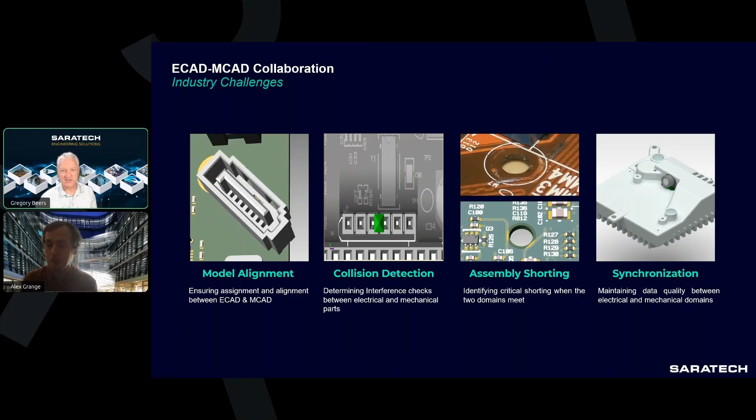And my personal favorite is this last one here, the synchronization. We all know what it's like to send an email and hope someone sees it today or tomorrow and replies back. Now, with the ECAD-MCAD collaboration, that synchronization happens much more rapidly and it's tracked.

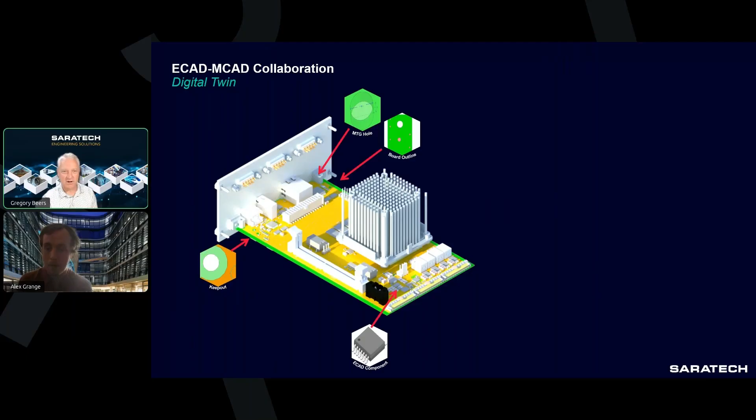So NX and Xpedition, we like to talk about this digital twin. You may have heard the digital twin and the digital thread. We're going to talk specifically about the digital twin for a moment. That's the actual piece that represents our board, right? And NX and Xpedition, they've been integrated now and really improve on the IDF interface, right? A lot of us have sent data back and forth in IDF, and we know that it's very static, right? We get a bare minimum of information. We get some holes, maybe a board outline, maybe some keep outs, very minimal data, right?

But now when we move into the world with a digital twin and the IDX interface, and you notice I got a real bad choice of words, right? IDF versus IDX, you got to enunciate, right? We have a lot more data, as you can see here, and that's just the tip of the iceberg as far as the Xpedition NX interface goes for this. We finally get to put a lot of things that we haven't historically been able to communicate through the IDX interface.

And one of my personal favorites is the fact that we can now handle RF elements, right? We can handle the cavities. We can handle those RF components being mounted down in the cavity, right? Specific filters and things that we couldn't recognize as an RF element on the board before, and of course, wire bonding.

And then the one that's near and dear to my heart is the flex information, right? There's a lot of crazy stuff that historically mechanical and electrical just didn't understand. We had to fake a lot of things. We've come a long way in just a few years, and Alex has really pushed hard to make sure we get a lot of this. We get the multiple board areas, we get the information of the actual stack up, we get the real thicknesses, right?

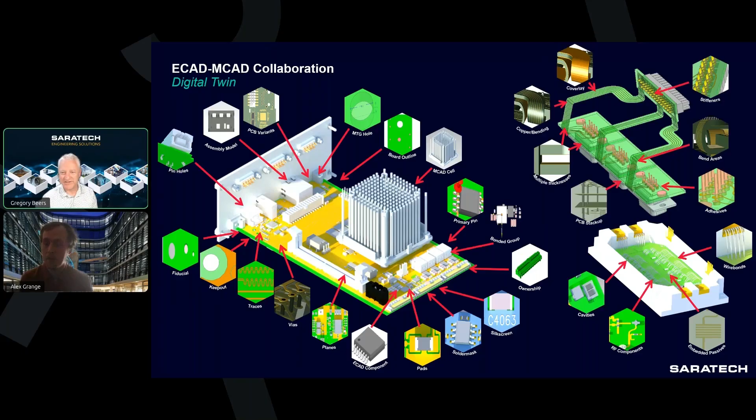And one thing that's super important here is we're able to bend not just the flex substrate and treat it like a solid, but we can bend the actual copper, right? And that really makes this rigid flex piece shine. So I talked about this is where the digital thread really shines. It's in this EDMD or ECAD-MCAD collaboration exchange. This is where things really shine.

One of the things that are important to know is that when we have this digital thread, that's the metadata, the data that we send up to Teamcenter or your PLM, right? And specifically, I'm going to talk to NX, Teamcenter, and Xpedition, mainly for obvious reasons, right? It's the tightest integration that I promote, but there are others, but I'm going to stick to those three for now. The digital twin, like I was talking about, that's really the 3D representation of the board, the physical board.

And you can see that by being able to have these communications, we reduce respins, right? And we pulled out some very important areas that respins happen. Not representing the 3D board properly, so mechanical and electrical can check it out. That causes respins. 3D interface checking. Do we have any collisions? Do we have anything hitting the chassis? Do we have a connector backwards, right? That can cause respins.

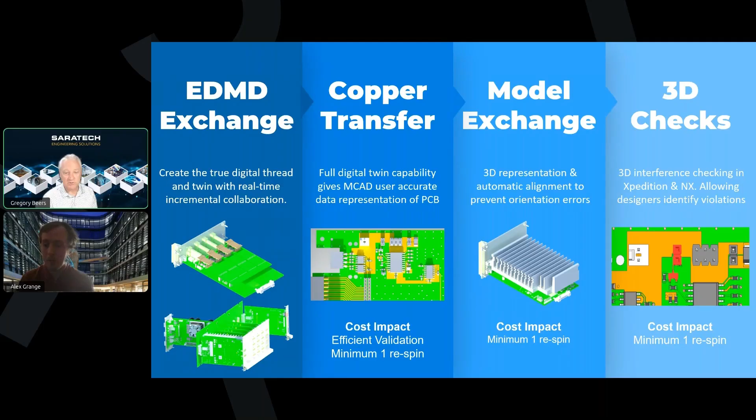And the last one is this model exchange, right? If we don't have the models correct between the mechanical world and the electrical world, we run into all kinds of problems. So the difference between IDF and IDX is really what we're talking about here with synchronization and design intent. It's real hard to show what your design intent is if you're not able to visualize what it is. If you're like me and you're a visual learner, this 3D realm really adds a lot of life to what we're doing.

And being able to propose and reject. If I send something over to my mechanical team from the electrical side, they have the ability to review it and say, no, you're crazy. You can't move that connector. It's going through a front panel, for example. So having ownership and the ability to control that's huge.

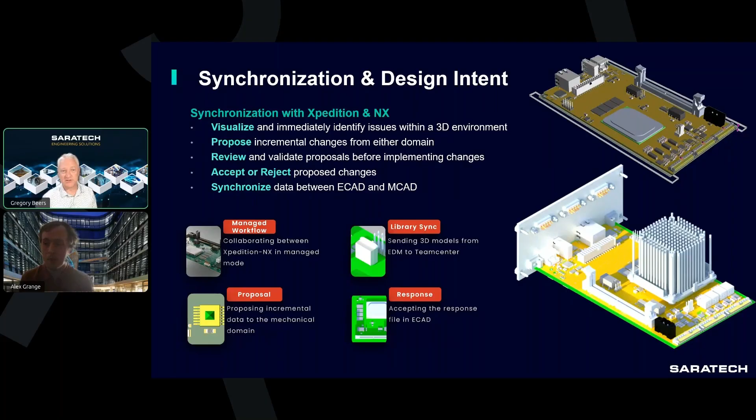And we're also moving from one giant data dump. When we did the IDF, you just dump data over the fence, give it to mechanical, and pray that they can implement it or they understand your intent. Moving away from that to a live data process where we forward data back and forth and stay in sync is huge. That's a better workflow, and you know what's changing when, and if that change was wanted. It also gives you who made the change, right? For me, these are huge.

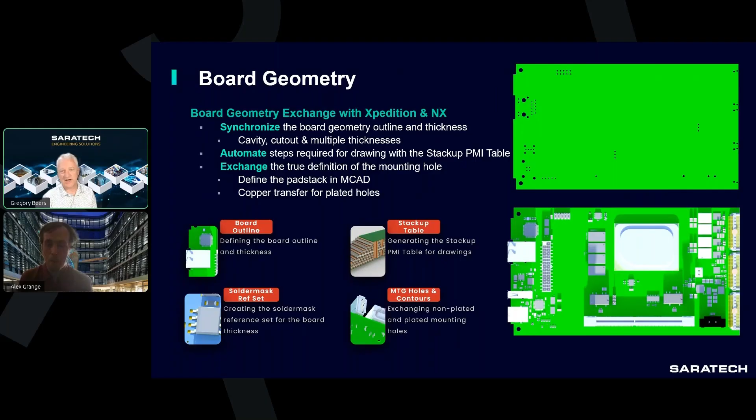The board geometry, this is where we've grown by leaps and bounds here. Xpedition and NX are able to better understand the entire board information, not just the pieces, but everything, the materials, the layers, the various board regions, available thicknesses. There's no other solution out there that's as holistic, and no other vendor has this level of communication.

Our component exchange, this is the 3D model exchange. One thing that's unique to NX and Xpedition is we know the IPC standards for these components, and the mechanical team at Siemens has been able to put this intelligence into NX so that it recognizes what we've got here. And that's tied directly into this 3D model exchange and the MCAD model, so that we can work and make sure everything's not just aligned, but those parts are recognized to be the same part, origins are the same, thicknesses are the same, landing patterns are the same. Makes a big difference.

That's a big point that Gregory is saying, because there is no other vendor out there that has ownership of both ECAD and MCAD. And with that ownership, you can see we have an aligned roadmap to work and collaborate on, in this case, component information.

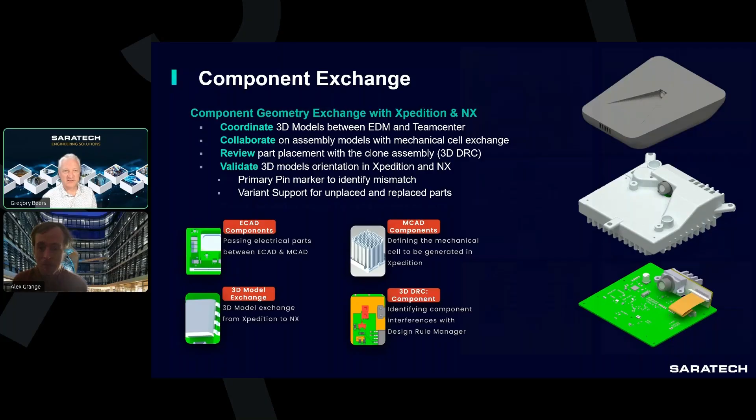So there's a lot of information we can get from that. And now that you have the best-in-class experts designing ECAD software and the best-in-class MCAD software, we're building a lot of ECAD software into the mechanical system. We're building a lot of the mechanical system over to the ECAD system, and you'll see that in the demo later today.

Thanks, Alex. The copper transfer, this is something that's kind of a double-edged sword, right? Mechanical always tells me, stop sending me so much information because it makes a giant database. Well, that is true. And so what I like about being able to do this copper transfer, the way they've done it now with the synchronization, I don't have to send it over every time. I can wait. I can make sure I have the board done. I've got my copper pours for my planes done. I've got special features for sinking.

The conductive shapes are all in there. My traces are in there. Solder mask is in there. But I don't have to send this over all at once. And more importantly, I don't have to send it over in a static format. I can send this over in what's called an external file. And what I mean by that is it's a file that NX is specifically waiting for and looking for,

and it understands things like traces, the pads for the components, all my planes and fiducials, wire bonds, solder masks, things that I kind of glossed over earlier, and even reuse circuits that are being used in Xpedition to step and repeat a circuit that you're going to use multiple times. All of this goes into an external file, and that data is live sent over to NX, and it's understood. It's not just feeding features over and hoping for the best anymore.

And this really helps with being able to do that clearance checking I was talking about and setting up rules both within NX and Xpedition so that we're syncing together on all the data live. And you can set up those rules all the way up to the net name. So it has that granularity. Excellent point. And the reason that's huge is now the electrical and mechanical can just say it's not that net right there. We can actually use the name. And on the Xpedition side, visualize it. I don't think we're quite that far on NX.

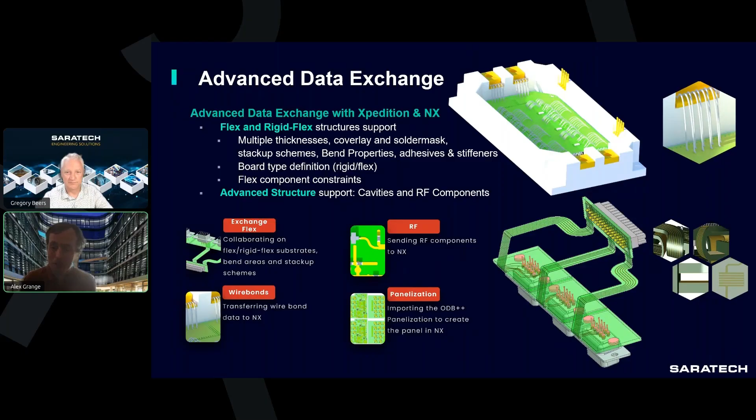Yes. That's our goal, that we implement functionality over to the other domain, but we don't want to change how those designers operate. We want mechanical designers in NX to have the look and feel of how they're doing designs in NX today. We want Xpedition designers to have the same look and feel. So they're not translating and trying to do mechanical work inside of an ECAD tool and vice versa. Well said. Having access to that information.

Okay, so the electrical mechanical exchange, what does that workflow look like, right? I'd like to show you graphically real quick what a typical data workflow would look like in this process. You can see here we've got an NX assembly. It's pretty bare. We've got a board outline. We've got some connectors on there. It would be pretty unique if it didn't start this way, right?

Mechanical typically tells me what my constraints look like. I've got a panel that they have in assembly that my board's going to have to mount to in some way. I got some connectors passing through. All this should look pretty normal if you're a mechanical folk, right? Once they get this to a certain point and they think, okay, we've got this nailed down, we can send it over and let the electrical guys work.

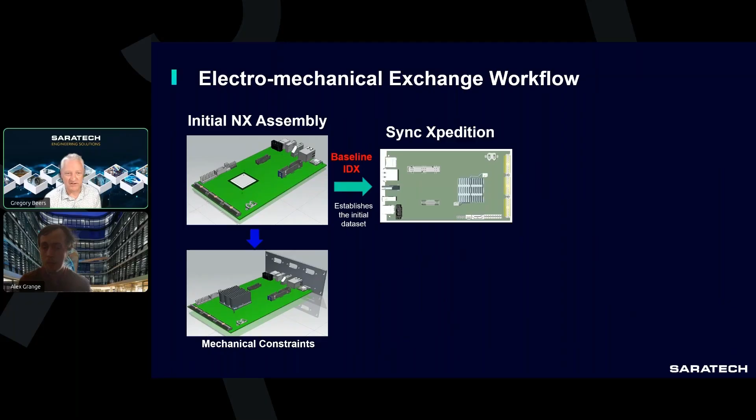We send over what's called a baseline file, and that IDX there, that's the IDX format that carries this intelligence forward to the Xpedition side. This establishes the initial intent coming into Xpedition. Then the Xpedition folks, the electrical engineers, do what they do. They place components, they route some critical nets. They do the typical electrical stuff. When they get that to a certain place, it's time to sync up with the mechanical folks.

And I love this particular part because everything that's done on the electrical side, we send that proposal back to the NX team, the mechanical team, and that has everything I've added, modified, deleted, moved by accident, and, this is really important, they can look at it and see, did I move a connector that was important? Did I bugger something up? A technical term, bugger, right?

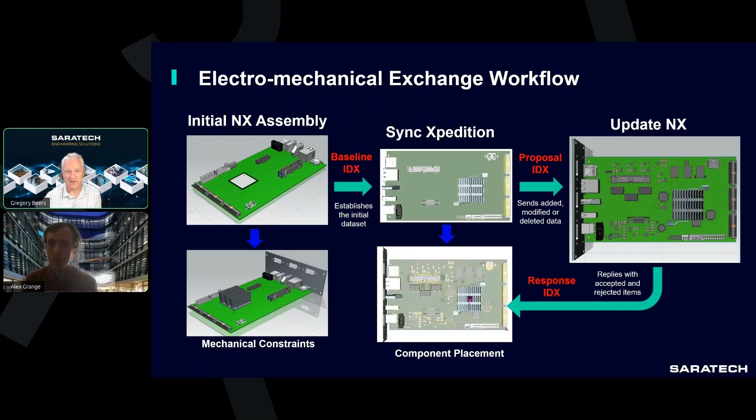And they'll send a response back with either accept or reject. If they reject, it's on me to see that they said, no, that cannot be moved. Or if I moved a component to get it away from a connector, they probably accepted that and said, this looks good, everything's locked down, move on. And I really like that because this is where you have a say, right? Mechanical doesn't have to think, the electrical guy moved a connector, now it's my job to get it back where it was.

The important thing to say here is with that rejection, that component will go back to the coordinates it was on before it was moved. And that's something that's been missing, right? We've always tried to realign things, and it's really annoyed my mechanical friends when I nudged a connector and they're trying to put it back in the exact location, or worse, rolling back a revision level to get it back. So then the response comes back into Xpedition. We finish laying copper pours, solder masks, things like that.

When it's complete, on the electrical side, we send what's called the externals. The externals we talked about earlier were those copper pours, solder masks, right? Things like that that don't fit in the normal proposal. And that would be for the final check in mechanical so they can do as they need and take care of this from there. Alex, is there anything you want to add here?

So the key overall goal here, obviously we recommend that you start with MCAD because typically MCAD owns the board outline. And they own where connectors should be placed or specific components that interfere with the mechanical assembly. But it's all bi-directional. We know all designs don't fit the same glove. You need different mechanisms to transfer. And you could start your baseline from Xpedition if necessary. You could start from NX. But in most cases, they should go along from the NX state.

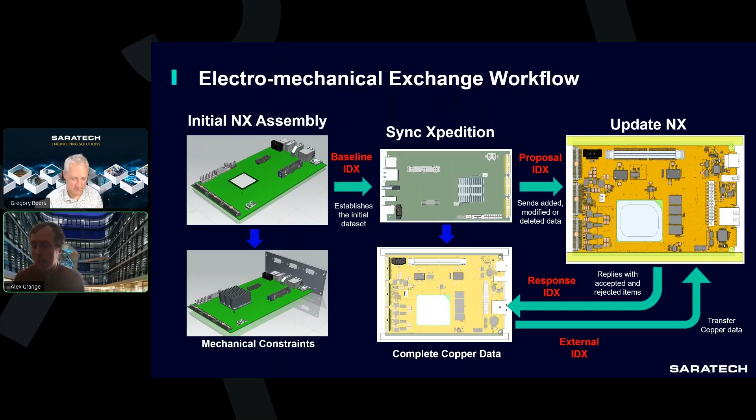And that's what the response file, which Gregory was describing, is making sure that the two domains are in sync. If somebody rejects something and doesn't move the component, it resets that component to its original location in the other domain. So you're both working off the same database.

So the one thing I want to highlight is that this is a preview, a short demo of the overall workflow to get you familiar with the functionality. We have a lot of features that we have developed over years of development time on this. So if you're interested to do a more deep dive, you can reach out to Gregory, myself, and we can go into a lot more functionality.

But the main goal, what I'm going to show you is just how do you collaborate? How do you send that initial data set and propose back and forth? But if you want to poke into that flex transfer, PCB variants, component exchange, library synchronization with Teamcenter, we can always schedule something afterwards because there is a lot of functionality we have built.

So in this example, you can see sort of similar to Gregory's slides. We have a board outline. This is defined by MCAD. We have some mounting holes defined with a panel that's brought in with some connectors that have been placed into the assembly. These have all the attributes added. This can be fed into a bill of materials through our Xpedition to Teamcenter integration, as well as other mechanisms. But the mechanical designer will have access to all the attribute information, so they don't have to guess what part is being used in that particular design.

The other thing is that we have a mix of electrical and mechanical components. We have a heat sink and we have a panel. Some of these elements won't exist in the ECAD database. But we want to reuse them, and we don't want to rebuild them. I've seen many people take DXF files, placement keepouts, and redraw them in the ECAD domain. But really, we should just reuse the work that the mechanical designer has done and just take advantage of it and bring it automatically into Xpedition, and that's what we do.

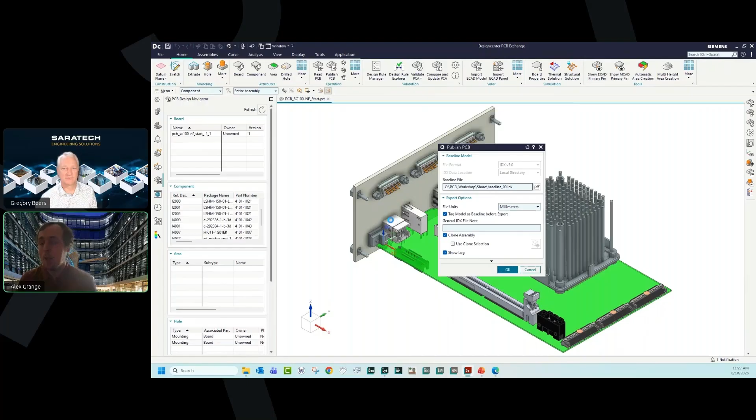So in this case, I haven't started my collaboration, so I want to create my baseline. And if we go to create our baseline, I'm going to clone the assembly. And when I clone the assembly, it's going to take all my alignment, all my mechanical parts that I've assigned into my design, and it's going to bring it out to an assembly file that I can bring into Xpedition. The baseline file also contains all the information for the board geometry, as well as the component locations and other information like placement keepouts and holes in the design.

So one of the key things we want to highlight is that everything can be accepted or rejected. So you can see we have a checkbox next to every object, so we can preview the information before we import it. So in this case, I can see my board outline. We can see the thickness is 882 microns. MCAD usually owns the thickness, ECAD owns the stack up. And that's one of the things that Gregory was saying in the PowerPoint is that we actually send that stack-up information over to MCAD so they can place copper in the right location.

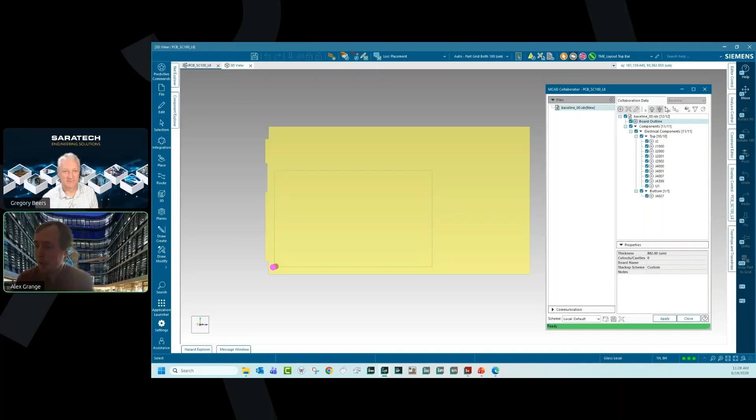They can create a stack up PMI table for drawing. They can even have a solder mask reference set for interference checking because they place the components in the right location. But in this case, this is a baseline. We understand that we want to create that initial data set and we want to apply everything in the design. And so what it's doing, and what's different than IDF, is that it's looking at every single one of those objects and it's providing a UID associated to each object.

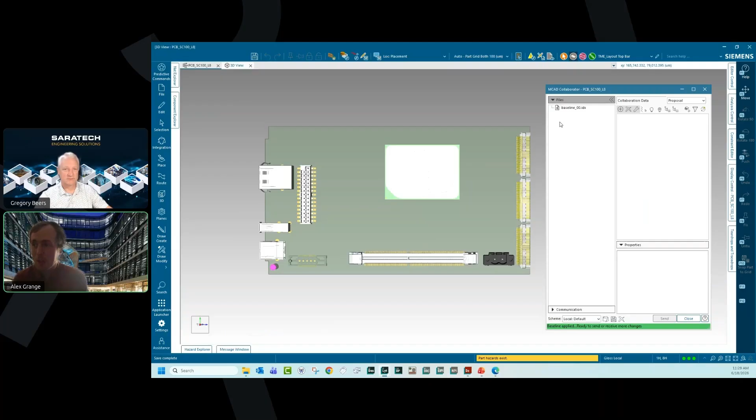So it takes that IDX file and puts it into the history section. So we can see a couple months later what was accepted or rejected. And then every subsequent collaboration, we only see what's been added, deleted, or modified. So you can see we have our Xpedition design.

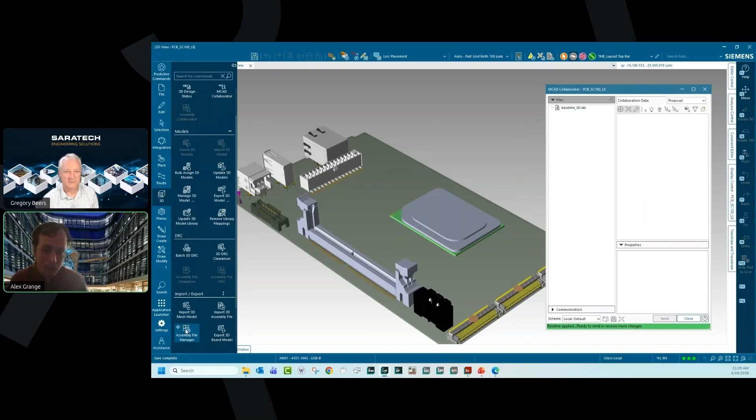We have our components. I'm skimming over a couple features like object ownership, where you could actually prevent ECAD from even moving those connectors. So if you set the ownership in NX, like Gregory was saying, it prevents the ECAD guy from moving anything. I can import that assembly file that was automatically created when I created that baseline. And I get those mechanical components and I can do interference checks associated to it in the design.

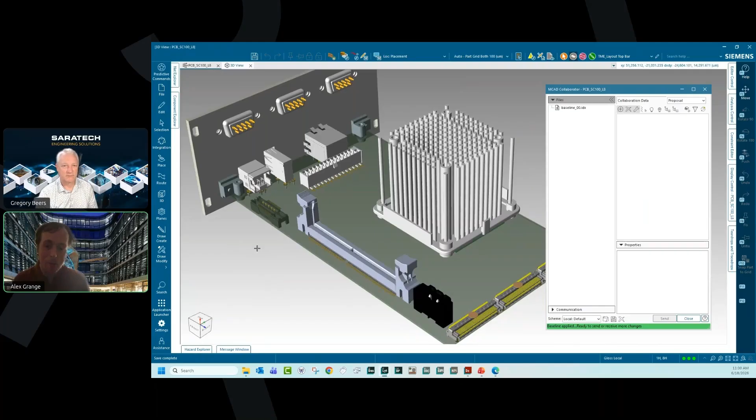So it could be a single component, or in this case, it's around a couple dozen because there's several elements associated to the panel on the front end. So you're getting more and more information from the mechanical domain into ECAD to make your proper component placement and strategies so that you avoid violations. So you're not cleaning up at the end, you're creating a better design while you're creating your PCB.

So I'm going to use a placement file. I don't want to fake it and just place a couple components. I want to have at least a couple dozen. So we're showing how we can send a real design over from the other domain. We have a 3D model exchange too. So one of the things that we can highlight is that we have a starter library as well as many sources to get the 3D models into the design.

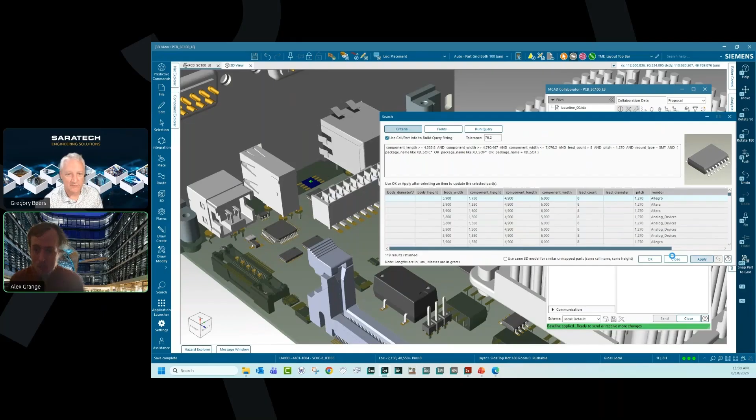I can search for a part, I can apply it, and automatically assign the 3D model, which you see there. We can convey that information over to MCAD. And one of the advantages of building on the ECAD side is that you see the component pads while you're assigning the 3D model. So you can see where pin 1 should be, which we also send in the IDX file. And we can make sure that the two components are aligned with each other so you don't have those respins that are caused by a mismatch.

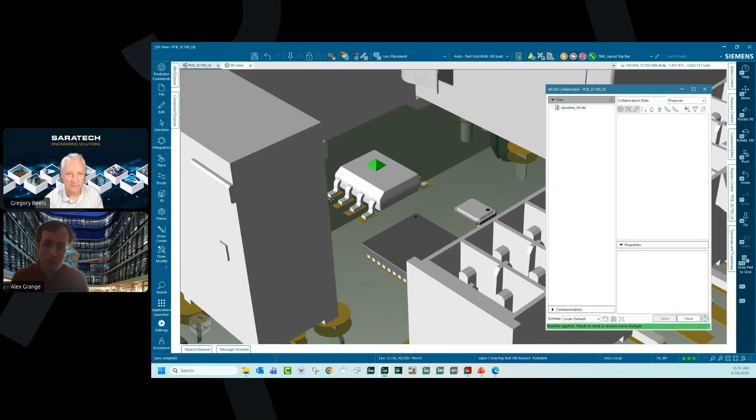So in this case, we want to send all these 91 components in the proposal, and we're going to send it over to MCAD so they can consume it, get the component placement, and build the 3D models if they don't have it in the Teamcenter library using the 3D geometry that I just assigned. And we can also add the additional attributes like the pin 1 location as well as the variant configuration.

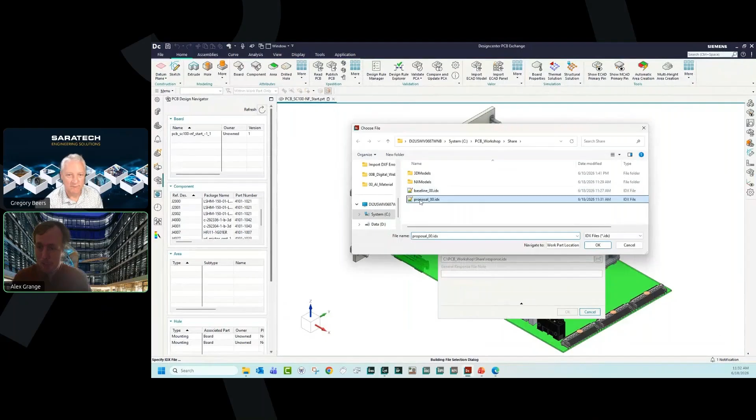So if I browse to that proposal file, you can see the information. I can preview, but for the sake of time, we can see all the components. You can see that I haven't sent anything on the board. I haven't sent any keep out restrictions. I haven't sent any mounting holes. It's just the 91 components in the design. For any of these elements that don't match my design requirements, I can just reject. I can reject all the changes.

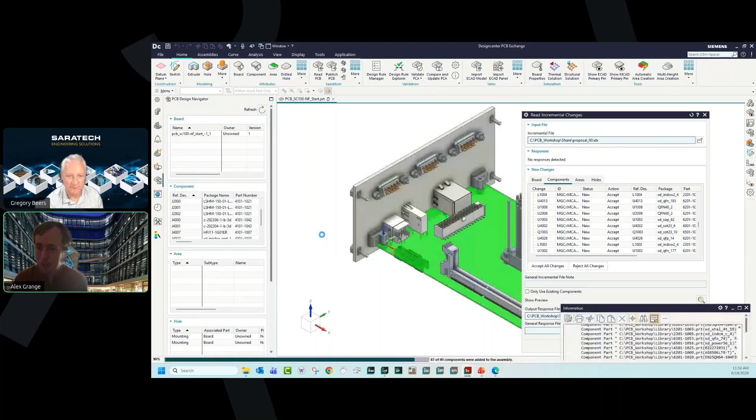But just for now, for this use case, we're going to accept all changes, and it's automatically going to capture whatever I've chosen in this dialog, and it'll send it in a response back to the ECAD designer so he knows what elements I've accepted and what elements I've rejected, so they can reset on the other domain and keep us in sync between the two. Once this is brought in, you can see the components. You can even see it created the variant configurations on here too.

So we're now synced. We have all our components. These 3D models were built on the fly. We have different configurations that we can have. The very quick tidbit is that you can see the variant configurations with the unplace and replace.

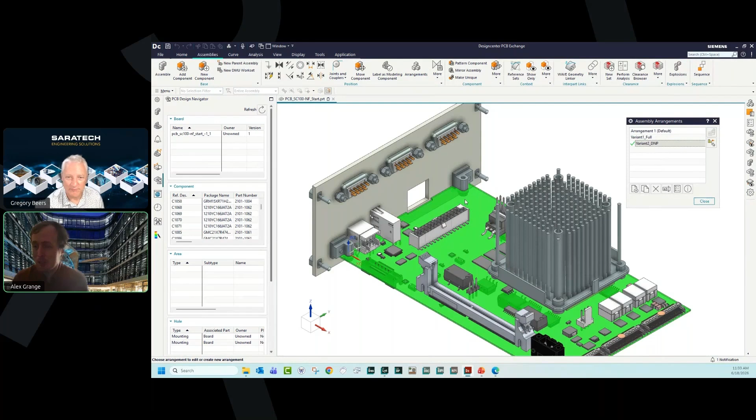I have 2 variants in my design. The full has everything configured, but if you do the DNP, the do not place variant configuration, you can see a couple of components were unplaced, and we can show it replacing. There's a lot of things we've done to make it better because anything that's unplaced is suppressed, so you can do interference checks and it won't give you a false violation. You can do thermal checks and it's not included in that thermal check if it's not part of that variant.

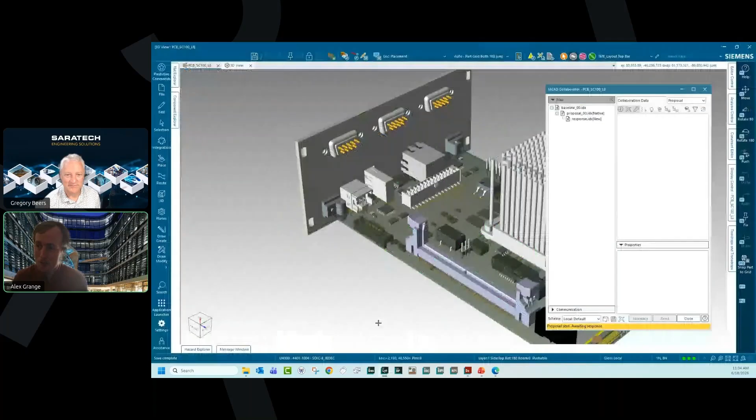And the last thing to finalize and bring into the Xpedition design is to close the loop. The mechanical designer basically went in and accepted all the changes. So you can see everything is checked in my design. We need to make sure that he hasn't rejected anything, or we need to reset and synchronize with the other domain.

And throughout the whole process, if you look at MCAD Collaborator, we try to guide you on what you need to do. So you can see we have sent a proposal and we're waiting for the response that's coming back. And we try to provide a little tree to allow you to understand what proposal and response they belong to. We have naming conventions. We have a co-design within Teamcenter to help manage this whole process back and forth.

In this case, I just want to apply the response, and you can see that everything was successful. We're synchronized, and we can send information back and forth. So we have completed our first exchange.

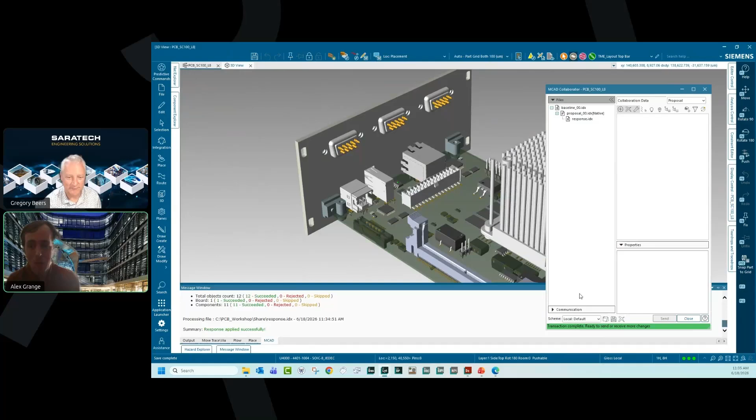This shows that instead of doing your typical processes where you're collaborating at the end of the design cycle, you can collaborate at the beginning all the way to the end, making a more robust design, better collaboration between your 2 partners, and you'll be able to create designs quicker and with less errors.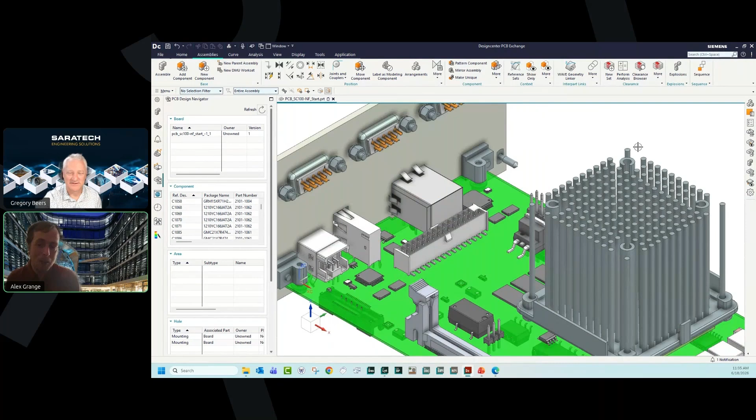One of the questions that we have is about the difference between digital thread and digital twin in this context. How does IDX enable both of those? So the digital twin is handled in IDX, representing just the PCB and its components and the things on the electrical side. The digital thread would be all of the design metadata, the rules checking, any code files you had for FPGAs, things like this. All that extra data would go to Teamcenter. And so that would be the digital thread piece.

The key thing that people like about the digital thread, the main thing that they want, is the BOM. With the BOM in Teamcenter, what we've also built onto it is library synchronization. So for the BOM, we provide all the information available within the item in Teamcenter. So we give the part name, the manufacturing properties, and we also give the part number and cell name.

This is one of the advantages of being part of the same umbrella: we noticed that NX and other mechanical tools didn't really understand what an alternate cell is, that it's different representations for the same part you would buy off a shelf, but you would insert it differently on the board. And so through this digital thread, we built a library synchronization where you could get 3D models with the alternate cell representation and build it into NX.

And then you would have a choice in NX to choose between those representations, and you would know that it's the same part number, but it's just a different choice. And the mechanical guy can decide what should be the representation, or the ECAD guy, since they have all the information available.